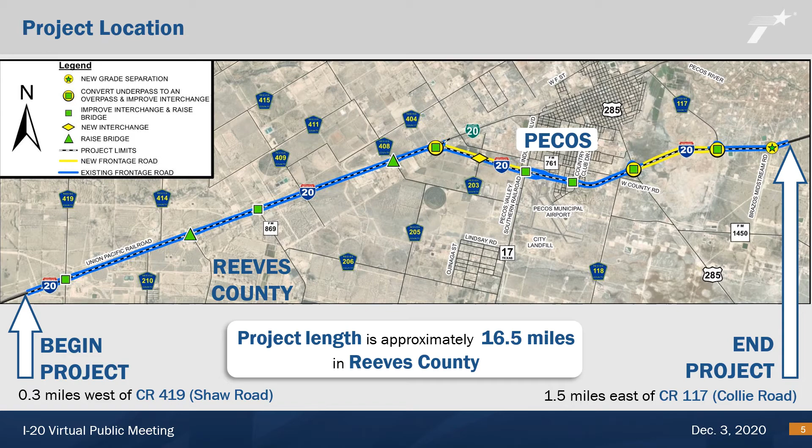The proposed I-20 project would begin at approximately 0.3 of a mile west of County Road 419, also known as Shaw Road, and would extend approximately 16.5 miles through Pecos, ending at approximately 1.5 miles east of County Road 117, also known as Collie Road. The project location map shown here is available for download or viewing on the project website and contains a legend to help explain the meaning of the various symbols shown on the drawing.

The problem this project seeks to address stems from the historic traffic growth on I-20. The average traffic growth rate on I-20 in Reeves County for the years 2014 to 2018 is 20.36%. This is an exceptional growth rate for a rural interstate. Future growth along this section of I-20 is predicted to be between 5 and 10% each year over the next 20 years. As an aging roadway, the interstate is in need of upgrades to accommodate this large traffic growth as well as the diverse vehicle types.

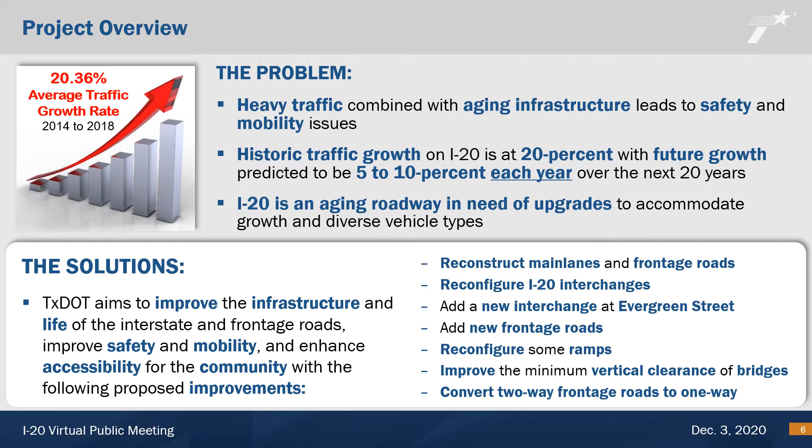This growing traffic, combined with the aging infrastructure, is creating safety and mobility issues that we are seeking to address. With this project, TxDOT aims to improve the infrastructure and life of the interstate and frontage roads, improve safety and mobility, and enhance accessibility for the community with the following proposed improvements: reconstructing the main lanes and frontage roads, reconfiguring several I-20 interchanges, adding a new I-20 interchange at Evergreen Street, adding new frontage roads where none exist today to create continuous frontage roads through Pecos, reconfiguring several interstate ramps, improving the minimum vertical clearance of bridges, and converting the existing two-way frontage roads to one-way.

Let's take a closer look at some of these problems. The I-20 main lanes in Reeves County carry a large volume of cars and trucks. This volume ranges from 11,000 vehicles per day west of Pecos to more than 22,000 vehicles per day east of town. The traffic volume grows incrementally larger from the west side of Pecos to the east side. Compounding this large volume of traffic is the fact that 35% of the total traffic on I-20 near Pecos is commercial truck traffic.

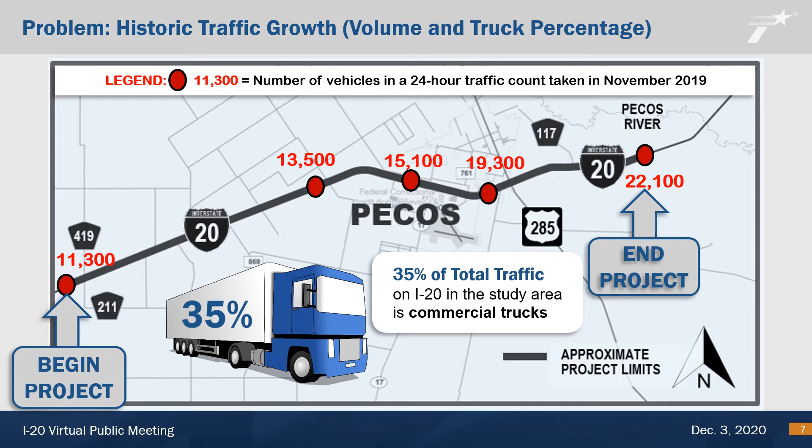One of the studies conducted for this project evaluated the mobility of traffic through the I-20 corridor. This study identified long intersection delays and poor level of service at 3 interchanges during peak hours. Those interchanges are at State Highway 17, Country Club Drive, and US 285. Level of service describes the operating conditions of a roadway based on factors such as speed, travel time, maneuverability, delay, and safety.

Level of service is measured using letter grades A through F, with A considered the best operating condition and F the worst. Level of service D has historically been regarded as a desirable design objective in urban areas.

However, State Highway 17, Country Club Drive, and US 285 have been evaluated to already be operating at level of service E and F in the peak hour, largely due to the high number of large trucks moving through these intersections. Without improvements, traffic operations within the corridor are expected to continue to worsen.

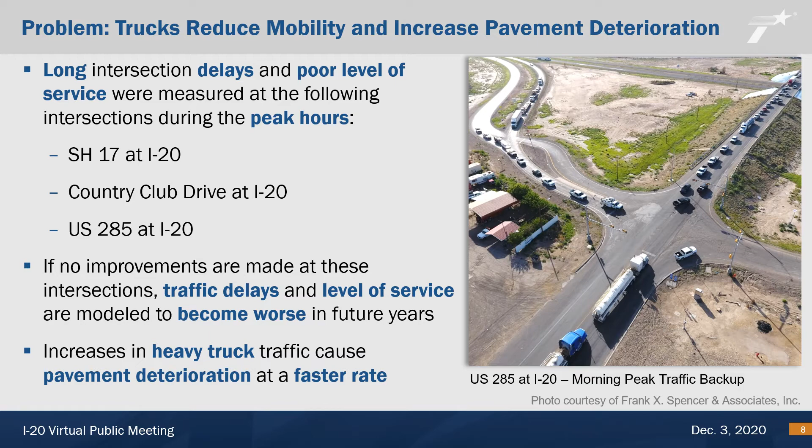Long intersection delays result in poor emergency response times, have negative impacts to the economy, decrease safety, and are a source of driver frustration. Moreover, large volumes of heavy oil-filled trucks cause the pavement to deteriorate at a much faster rate. Improving safety is a key goal for this project.

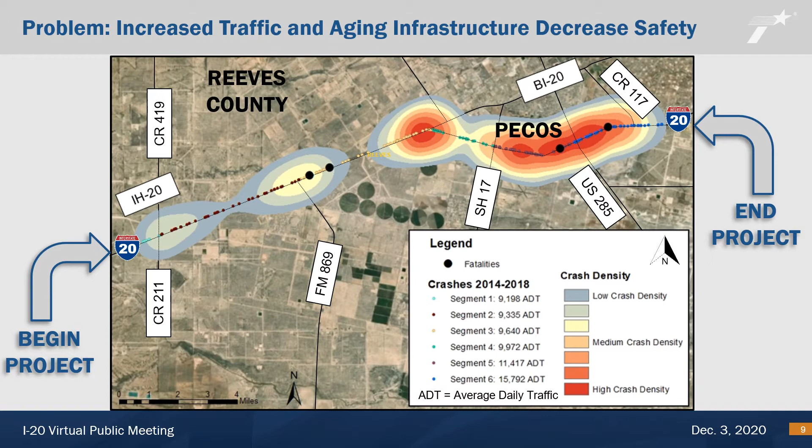The areas with the highest crash density are located closely to the town of Pecos City. The crash analysis found that I-20 west of Business 20 has a crash rate 35% higher than the statewide average, and I-20 east of US 285 has a crash rate 37% higher than the statewide average. Without roadway improvements, these numbers are expected to increase.

Now that we have identified the problems, we would like to talk about some proposed solutions. I-20's aging infrastructure is in need of updates, including rebuilding the main lane and frontage road pavements to accommodate increased weight and volumes of heavy trucks, and bringing the facility into compliance with current safety guidelines developed since the interstate was initially constructed.

It is proposed to reconstruct both the main lanes and frontage roads of I-20 starting 0.3 of a mile west of County Road 419 and ending 1.5 miles east of County Road 117. The proposed project follows the existing roadway alignment. Approximately 58.2 acres of new right-of-way and approximately 1.6 acres of new easements are proposed. No residential or commercial displacements or relocations are anticipated.

If the preliminary schematics identify a need for new right-of-way from your property, please visit TxDOT.gov and enter the keyword search Landowners' Rights Publications, and download the following items: Landowner's Bill of Rights, State Purchase of Right-of-Way Booklet, and Relocation Assistance Booklet. We encourage you to contact a project team member if you have questions about the right-of-way acquisition process.

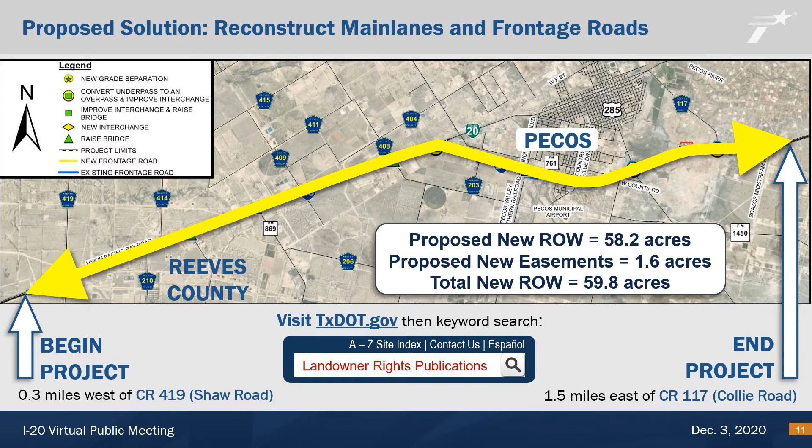When reconstructing the frontage roads, we are proposing to construct an urban typical section within the urban area of Pecos. The urban area is defined as the portion of the interstate between Business 20 on the west and US 285 on the east. The urban typical section for frontage roads would consist of two 12-foot wide lanes with concrete curb and gutter.

Within the urban area, we would propose to construct a shared use path for bicycles and pedestrians on one side of the interstate and a sidewalk for pedestrians on the other side. Each intersection would provide a shared use path across the intersection to provide connectivity to the shared use path along the frontage road.

The rural typical section for frontage roads would consist of two 12-foot wide lanes and a 10-foot wide shoulder. The rural frontage road section would be constructed west of Business 20 and east of US 285. No pedestrian accommodations are proposed for the rural typical section.

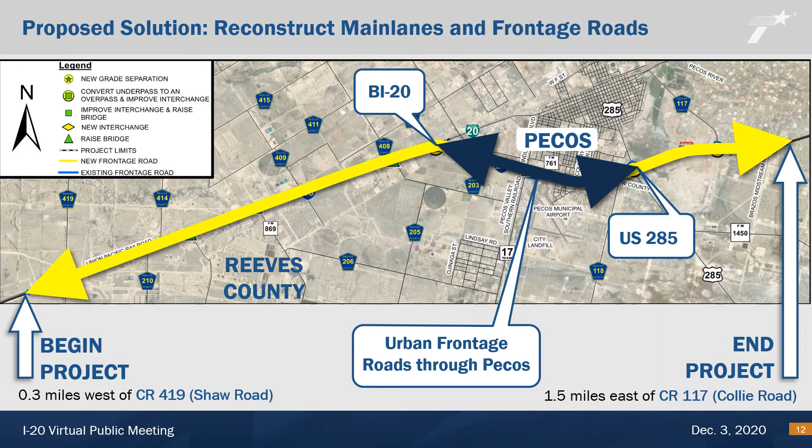Roadway construction is costly, and it is likely that the proposed rebuilding of this 16.5-mile-long project would need to be phased into multiple construction projects and developed over a period of years as funding is identified. This study would help TxDOT identify and prioritize the sections of I-20 which are in more pressing need of repair and/or updating, and those sections would be proposed to be reconstructed first.

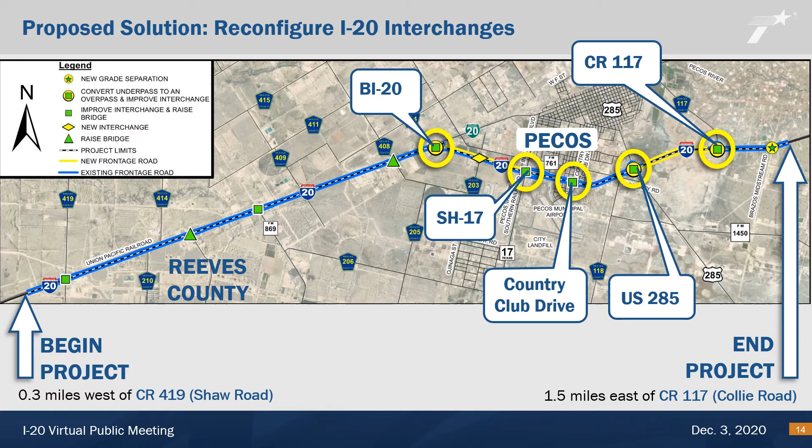Since I-20 was first built, the town of Pecos City and Reeves County have both experienced significant growth and development. With this growth, I-20 needs to be modernized. This project proposes to reconfigure and update 5 interchanges near Pecos, including Business 20, State Highway 17, Country Club Drive, US 285, and County Road 117.

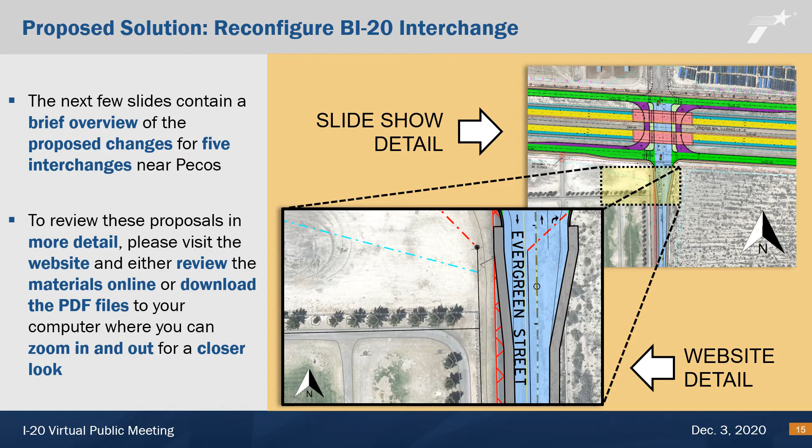The first interchange proposed for reconfiguration is I-20 at Business 20. The current interchange is depicted in the red crosshatched shading. This red shading also indicates the pavement that is proposed for removal. This project proposes to flip the intersection and put the I-20 main lanes over Business 20.

New one-way frontage roads, shown in green, would be constructed to run parallel to the I-20 main lanes, shown in yellow. Business 20, shown in blue, is proposed to be realigned to form a standard street intersection at I-20. U-turn lanes, shown in purple, are proposed on both sides of Business 20 to make it easy for frontage road traffic to turn around without having to pass through the intersection.

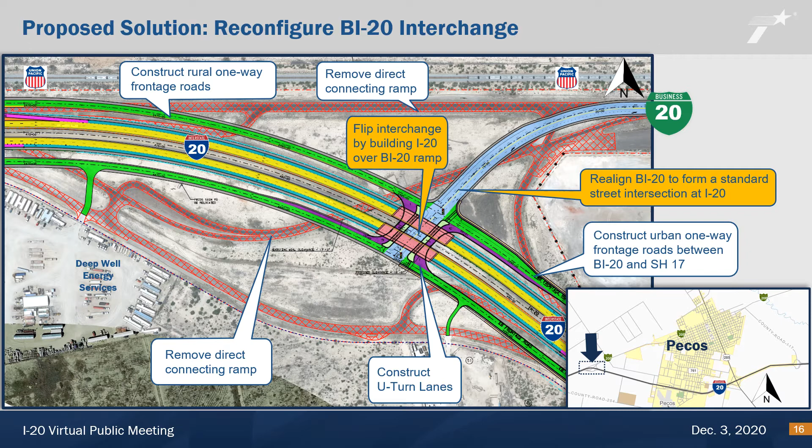Significant improvements are proposed for the State Highway 17 interchange. The proposed reconfiguration of this interchange would be possible because of the proposal to convert the two-way frontage roads to one-way operation. This layout depicts the proposal to extend the I-20 frontage roads, shown here in green, to the west side of State Highway 17, shown in blue, across the Pecos Valley Southern Railroad tracks.

This would form 2 at-grade railroad crossings along the frontage road. These at-grade railroad crossings would be protected using flashers and gate assemblies to control vehicular traffic when trains are present. The new north frontage road would be extended all the way to Business 20 to form a continuous westbound frontage road between State Highway 17 and Business 20.

Another change is a proposal to remove the I-20 main lane bridges over Industrial Boulevard and to add U-turn lanes, shown in purple, on either side of State Highway 17. Traffic using Industrial Boulevard, which wishes to cross the interstate, would turn right at the new one-way frontage road and then use the U-turn lane at the next intersection to make a turnaround to the opposite one-way frontage road, and then return to Industrial Boulevard on the other side of I-20.

The red crosshatch shading indicates existing pavement to be removed. Please note that some segments of the existing frontage roads would be repurposed to provide access to adjacent businesses which currently adjoin the existing frontage roads. These repurposed local access roads are shown in dark green shading.

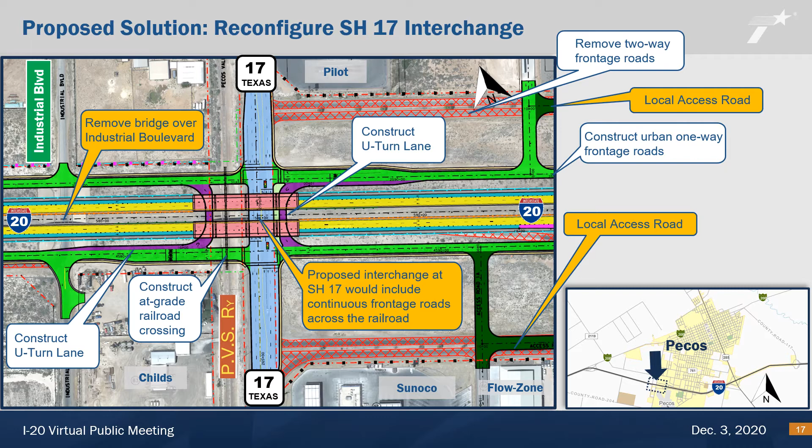Key changes to the I-20 interchange at Country Club Drive include lengthening the I-20 bridge span, shown here in pink, over Country Club, shown in blue, to allow for additional lanes on Country Club. Today, the existing bridge span only allows for 2 lanes of traffic on Country Club, while the widened span would allow for side-by-side left turn lanes and 2 through lanes in each direction, accommodating more traffic to safely and efficiently pass through the intersection.

The new I-20 bridges would also accommodate U-turn lanes, shown in purple, on either side of Country Club to allow frontage road traffic to turn around without passing through the intersection. Furthermore, the profile of I-20 would be raised to increase the vertical clearance to meet new guidelines.

The red crosshatch shading indicates existing frontage road pavement to be removed. Please note the segment of the existing frontage road, shown in dark green, on the north side of I-20 between Country Club and the alley west of Eddy Street. This segment would be repurposed to provide local access to adjacent homes.

Today, these homes have driveway access directly to the existing 2-way frontage road. With the proposed improvements, these homes would use the local access road to reach Eddy Street and then use Meadowbrook Drive to reach Country Club Drive. These proposed improvements would greatly improve the safety and mobility at this intersection.

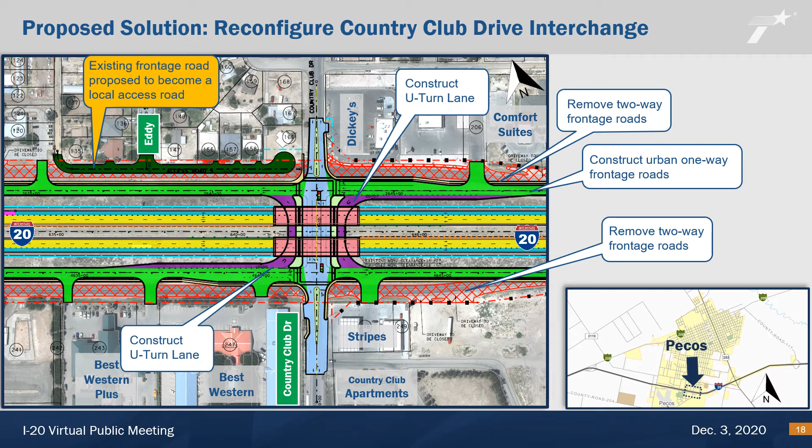The next interchange proposed for reconfiguration would be I-20 at US 285. This project proposes to flip the intersection and put I-20 over US 285. Everything shown in red crosshatch shading would be removed, and the new one-way frontage roads, shown in green, would run parallel to the I-20 main lanes, shown in yellow.

US 285, shown in blue, would be at ground level with standard frontage road intersections on either side of the interstate main lanes. U-turn lanes, shown in purple, would be added on each side of US 285 to allow frontage road traffic to turn around without having to pass through the intersection. Today, the existing 2-way frontage roads terminate at the west side of US 285.

This project proposes to build one-way frontage roads east of US 285 to connect to County Road 117.

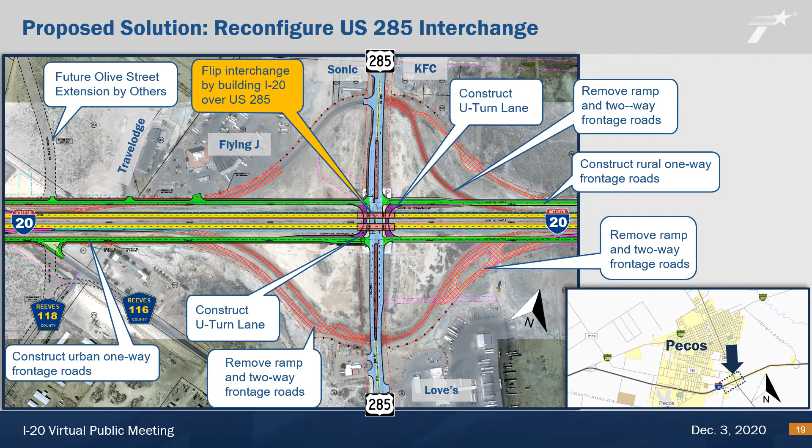In the upper left-hand corner of this slide, we have highlighted a future proposed extension of Olive Street by others. The City of Pecos is evaluating alternatives for a possible extension of Olive Street across I-20. However, this street extension is not a part of this I-20 project and would be funded by the city as a separate project.

The next interchange to be reconfigured would be I-20 at County Road 117. This project proposes to flip the intersection and put I-20 over Collie Road. Like the improvements at US 285, everything shown in red crosshatched shading would be removed, and the new one-way frontage roads, shown in green, would be constructed parallel to the I-20 main lanes, shown in yellow. County Road 117 would be at ground level with standard frontage road intersections on either side of the I-20 main lanes. U-turn lanes, shown in purple, would be added on each side of Collie Road, shown in blue, to allow frontage road traffic to turn around without having to pass through the intersection.

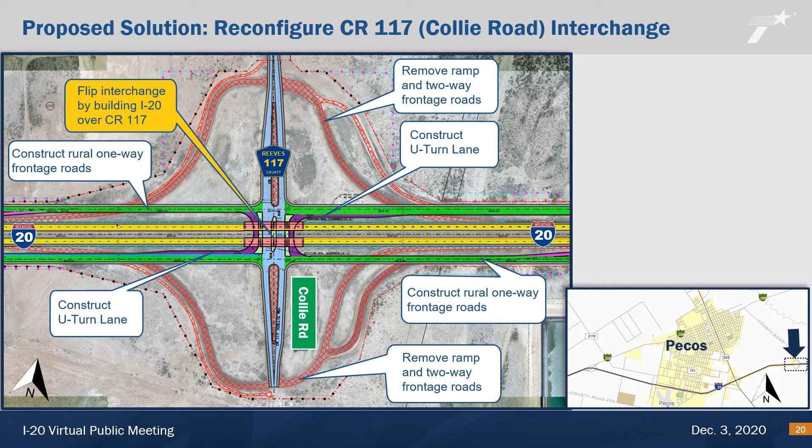As mentioned previously, there are currently no frontage roads between US 285 and County Road 117, but this project proposes to build new frontage roads to connect US 285 to County Road 117. For the existing 2-way frontage roads to be effectively converted to one-way operation, frequent turnaround locations are needed to prevent drivers from having to drive extensive distances to make a U-turn.

The distance between Business 20 and State Highway 17 is basically 2 miles. This project proposes to build a new interchange at Evergreen Street, which would be located halfway between Business 20 and State Highway 17, placing the three interchanges 1 mile apart. A new interchange at Evergreen Street would provide improved access to the Greenwood Cemetery and the Reeves County Detention Complex. Moreover, it provides a convenient U-turn location for the proposed one-way frontage roads between Business Interstate 20 and State Highway 17.

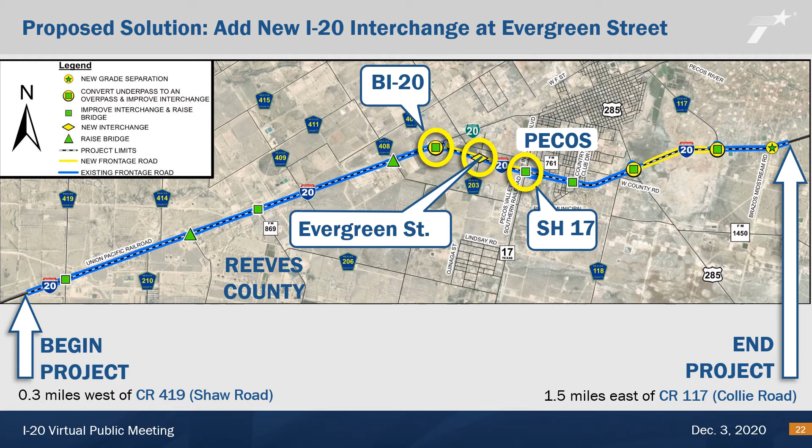Should the City of Pecos or Reeves County decide to build a street connection on the north side of this new interchange, the proposed pavement on Evergreen would be wide enough to accommodate 2 lanes northbound and 2 lanes southbound, with a left turn lane in each direction. A new street connection on the north side of the interstate would provide direct access between I-20 and Business 20 through the industrial area north of the interstate. This street connection is not proposed as a part of this project, but would be funded by the city or the county as a separate project.

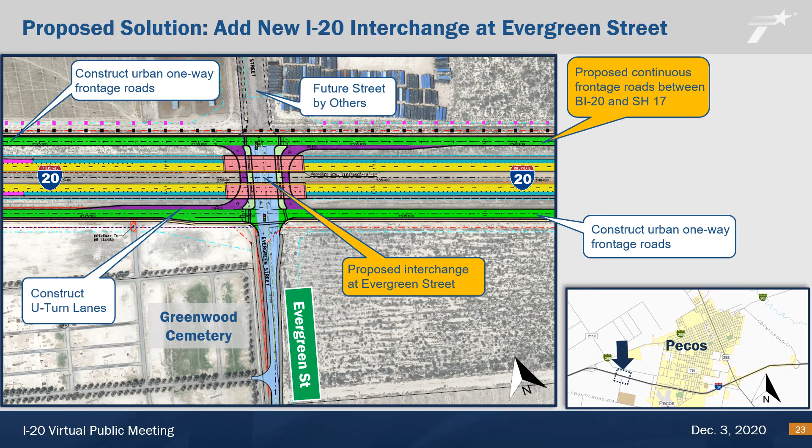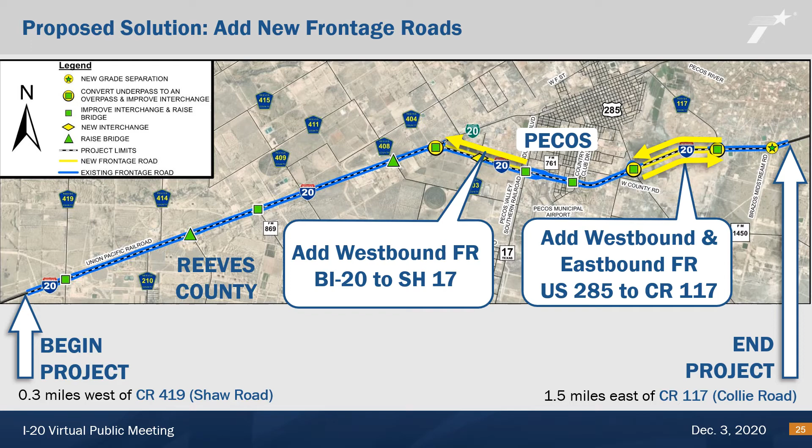The frontage roads along I-20 through Pecos are discontinuous with gaps located at 2 locations. This project proposes to complete those gaps in order to provide continuous frontage roads through the entire corridor. A proposed westbound frontage road would be constructed along the north side of I-20 between Business 20 and State Highway 17. Eastbound and westbound frontage roads would be constructed along each side of I-20 between US 285 and County Road 117. Completion of these gaps in the frontage road system would improve mobility and safety through Pecos by providing alternate routes for emergency services when incidents occur on the I-20 main lanes. The proposed frontage roads would also provide improved local access for local traffic not wishing to use the I-20 main lanes.

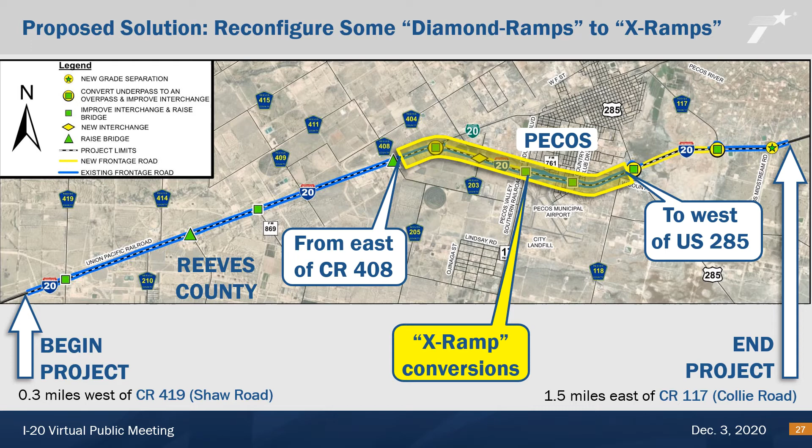All of the current entrance and exit ramps within the I-20 corridor are configured in a diamond ramp pattern. Diamond ramp configurations work very well at lower volume interchanges, but can have issues in higher volume urban interchanges. This project seeks to improve accessibility and safety at the higher volume interchanges by converting diamond ramps to X-ramp configurations. The limits of the proposed X-ramp conversion extend from the east side of County Road 408 to the west side of US 285. Outside of these limits, it is proposed to maintain the current diamond ramp configurations.

With the X-ramp configuration, the locations for the on and off ramps are reversed from the diamond ramp pattern. The off ramps are located immediately after the cross street, and the on ramps are located immediately before the cross street. The X-ramp configuration would resolve one issue experienced on diamond ramps, which is at certain peak traffic times, traffic exiting from the interstate to the cross street begins to back up down the exit ramp and stacks up onto the interstate main lanes.

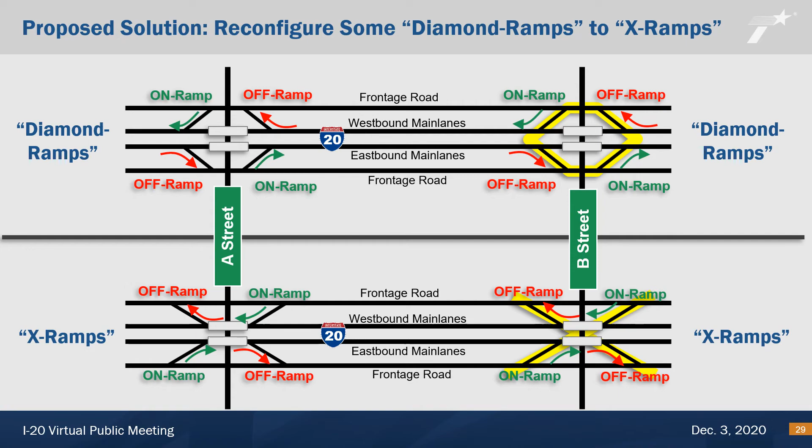To reach State Highway 17, traffic on westbound I-20 would exit just west of Country Club Drive, and traffic on eastbound I-20 would exit just east of the new Evergreen Street interchange.

Similarly, an auxiliary lane is proposed along the I-20 frontage roads between off-ramps and on-ramps.

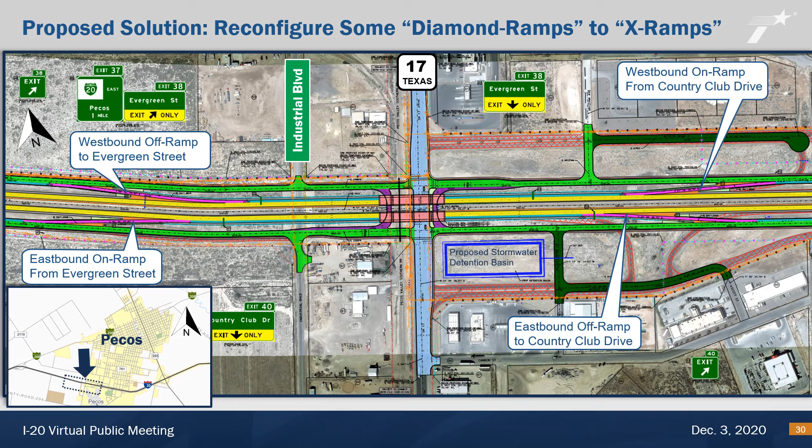The Texas Freight Mobility Plan requires TxDOT to develop a bridge reconstruction and replacement program to address deficient bridges, increase vertical clearance to 18 feet 6 inches to accommodate oversized overweight vehicles and military transportation needs, and to facilitate the efficient movement of people and goods.

This project will serve as a mechanism for reconstructing the bridges on I-20 in Reeves County. While this guideline does not apply to freight corridor overpasses, this project will evaluate the feasibility and benefits of raising overpasses to meet the new 18 feet 6 inch requirement, as it would benefit the oil and gas industry of Reeves County by providing multiple crossing locations for high-load vehicles to cross under I-20.

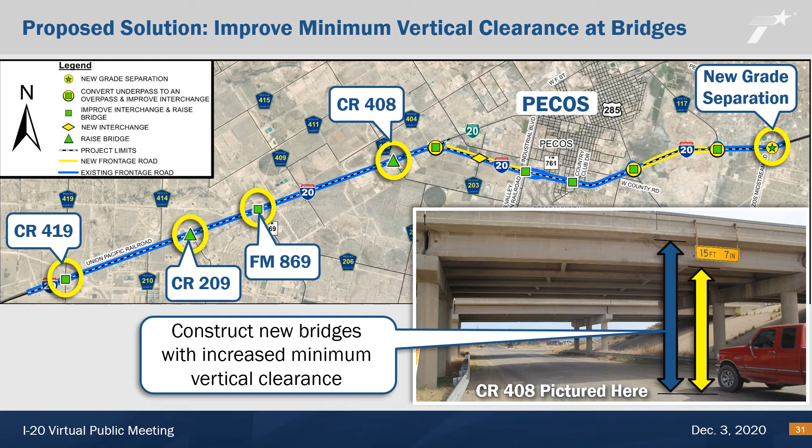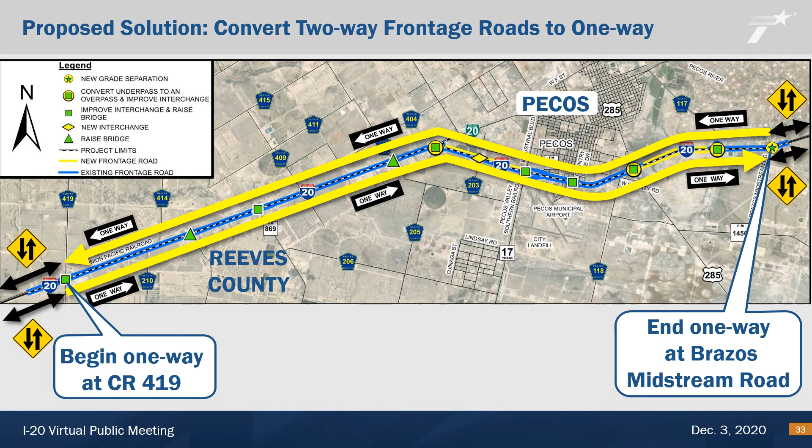One of the biggest changes this project proposes to make to the I-20 corridor in Reeves County is to convert the existing two-way frontage roads to one-way operation. This project seeks to convert approximately 16 miles of two-way frontage roads to one-way operation. Limits of the proposed conversion are between County Road 419 and a new grade separation proposed for construction at Brazos Midstream Road, which is located approximately 1 mile east of County Road 117.

To help make the conversion successful for adjacent local businesses and residents, this project offers the following design features: U-turn lanes at every grade-separated intersection to provide for quick and safe turnarounds, one-way continuous frontage roads, as this project would fill in the gaps in the current frontage road system through Pecos, reconstructed and improved interchanges and cross streets, an additional interchange at Evergreen Street between Business 20 and State Highway 17, and reconfigured ramps to support one-way frontage roads.

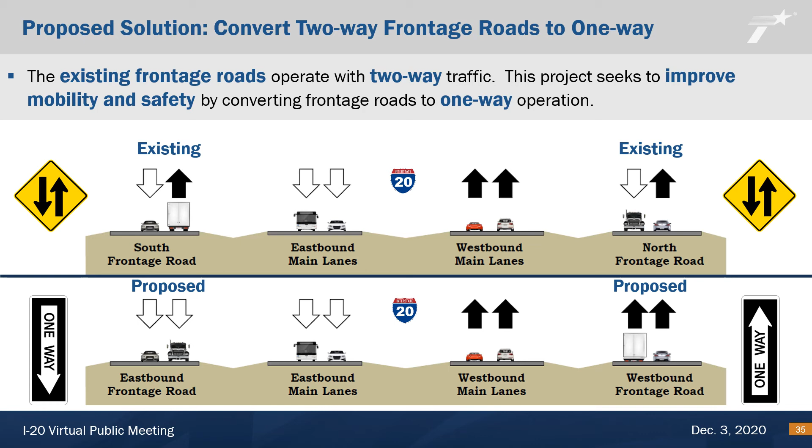With any project receiving federal funds, TxDOT is required to evaluate the potential environmental consequences of the proposed project. The environmental review process we follow is in accordance with the National Environmental Policy Act of 1969, otherwise known as NEPA. The NEPA process results in documentation that is provided to decision makers so they have all the data needed to make an informed decision if the project should proceed.

In December 2014, TxDOT received a signed Memorandum of Understanding from the Federal Highway Administration that allows TxDOT to assume some responsibility from the Federal Highway Administration to review and approve certain assigned NEPA projects.

In December 2019, this memorandum was renewed. The review and approval process apply to this project. In short, TxDOT will follow all state and federal laws to identify and review potential solutions for long-term safety and mobility improvements.

On the I-20 corridor in Reeves County, as we evaluate various proposals to improve safety and mobility through infrastructure construction, our project team will identify and study environmental constraints on or adjacent to the corridor. The proposed roadway improvements would be designed to avoid or minimize impacts to the natural and human environments.

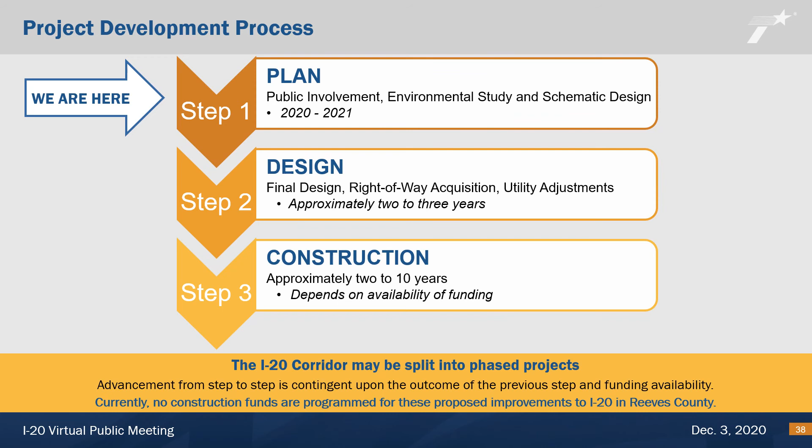This effort can take approximately 2 or 3 years for each identified project, sometimes even longer. Finally, upon approval to move to construction, each individually phased project can take up to 2 to 10 years for completion. TxDOT is committed to continuing our efforts to gain public feedback about this project.

Now we would like to explain the ways you can comment on this project. Step 1 is for you to review our proposed improvements for I-20. Please visit the virtual public meeting webpage by going to TxDOT.gov, keyword search I-20 Reeves County. On the webpage, scroll down to the Downloads section. You will be able to click on each item and review it online, or you can download it to your computer. Please feel free to download and review the materials at your convenience.